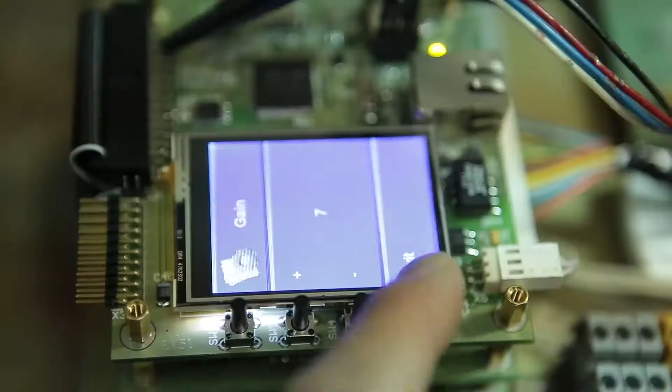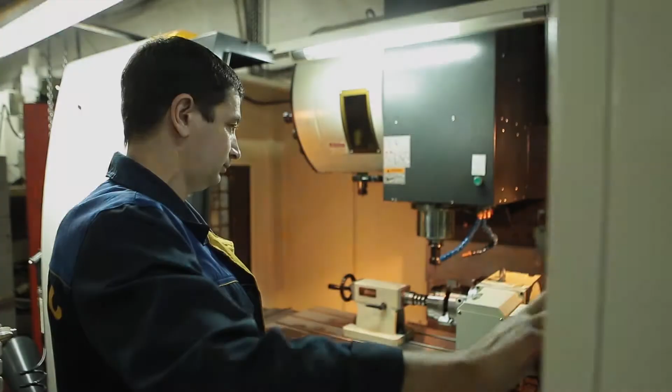Due to these circumstances, the company Technoros applies the latest results of science and technology in its development and releases products with world-class quality. Technoros is a diversified manufacturing enterprise with more than 20 years of history. We offer innovative technologies and equipment of our development. We have facilities with a full production cycle, from the design of a new equipment to its serial production.

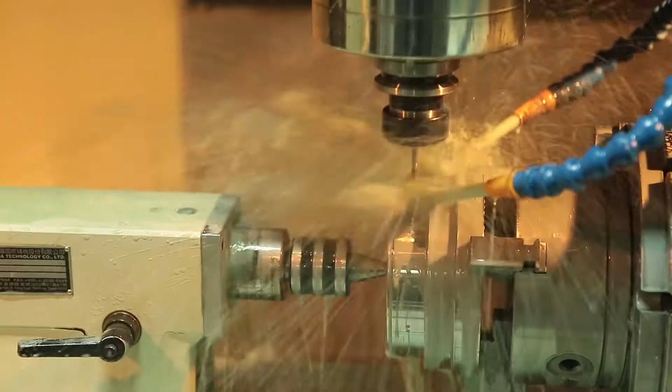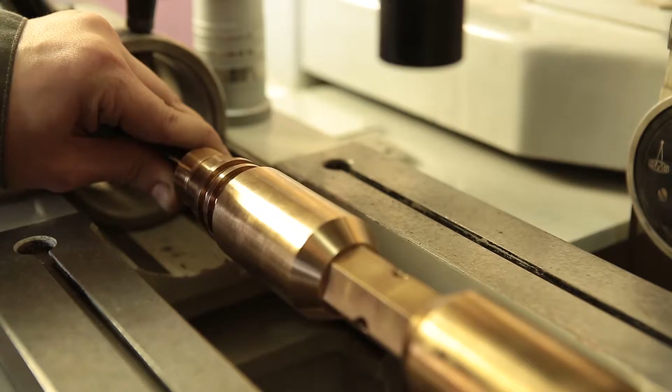High level of quality, technology and production culture of the enterprise is a priority task at all stages, from design to manufacturing of finished products. Our team of engineers is ready to solve complex production problems. Advanced technology and quality system implemented at our enterprise enable to develop and manufacture a wide range of automation facilities, non-standard equipment and precision machining details.

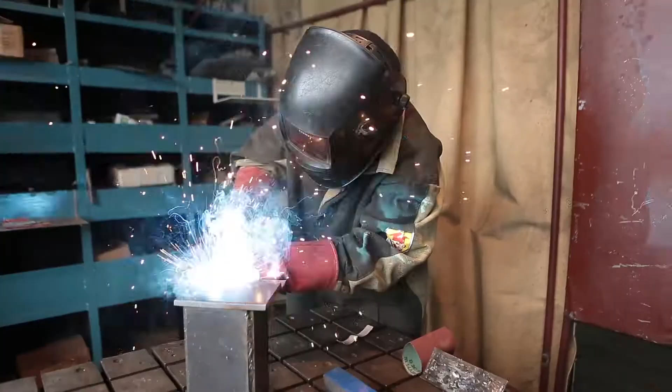To date, we have already implemented our products at various enterprises, from warm seas to far north, from the southern deserts to the Arctic shelf.

Ore sorter KSF for lump sorting of ore and technogenic materials. The fundamental in the materials industry is in the ore body head grade. At the present time, the global challenge of the mineral plants is falling ore grades. Metal production from such ore is expensive and low efficient. Considering the uneven distribution of valuable minerals in the run-of-mine ore, it must be sorted in order to get quality materials for mineral processing plants.

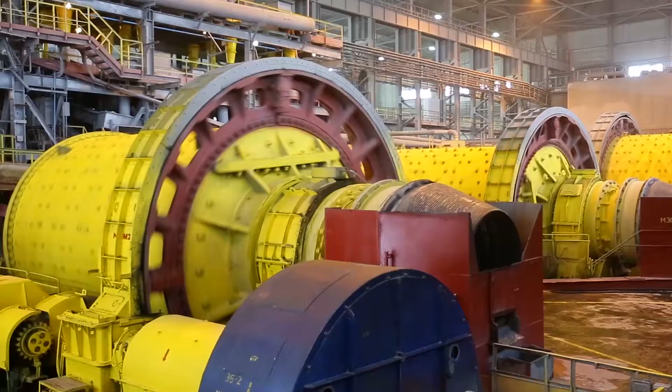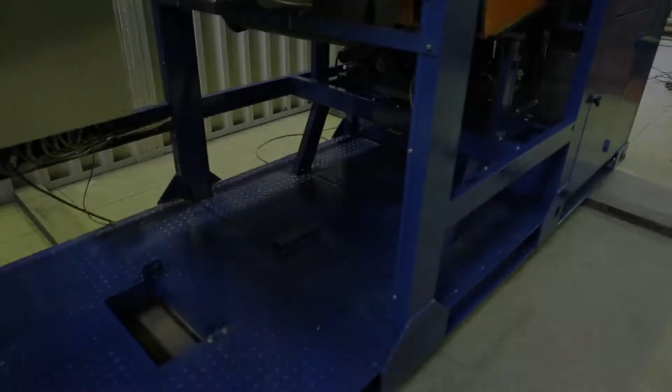The effect of sorting consists in the increasing of metal production while the amount of material fed to the milling circuit decreases. The economic impact is in reduction of the production costs. In ancient times, the ore was sorted manually by specially trained workers. Human labor has been replaced by machinery. Such equipment is designed and manufactured in our company. It enabled to separate the stones containing valuable mineralization from barren stones using X-ray fluorescent ore sorters. The product of ore sorting and pre-concentration is a high-grade ore.

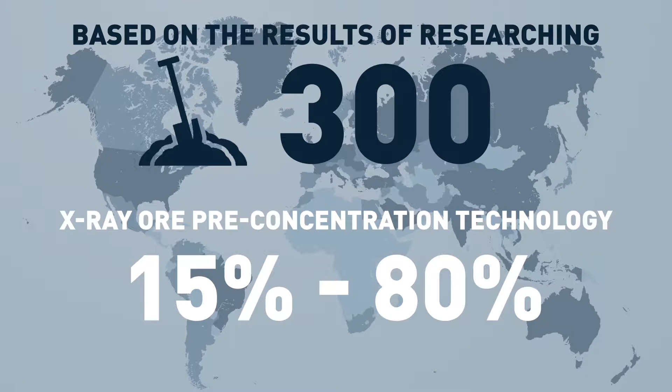Based on the results of researching on more than 300 deposits, we found that X-ray ore pre-concentration technology can reject from 15% to 80% of waste stones from the run-of-mine stream, which contains no economic metal values. Ore sorter KSF is designed for pre-concentration of low-grade ore, separation of ore into diverse types, followed by its separate treatment in the plant, production of sellable concentrate, sorting of slags and wastes of metallurgical industries.

Ore sorter can be applied in precious metal processing, gold, silver, platinum, polymetallic and monomineral ores, cobalt, copper, zinc, lead, tin, antimony, barium, etc. Ferrous ores, chromium, manganese, iron, rare metals, diamonds, fluorite, quartzite, sillimanite, magnesite, bauxite, coal, waste and slag of refining factories, aluminum, silicon, copper production, etc.

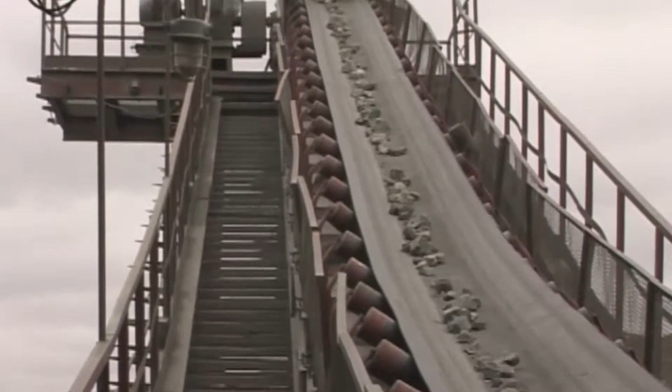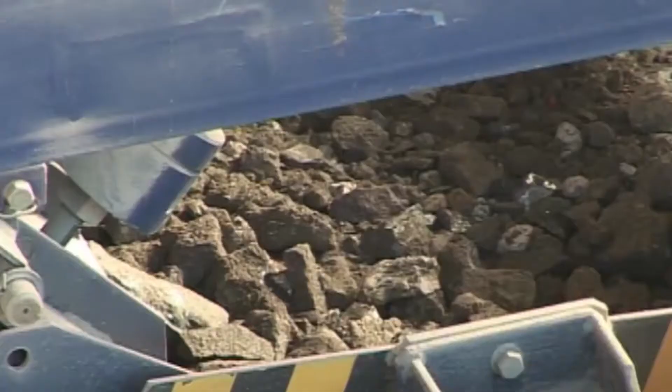It is based on processing of the secondary X-ray spectrum detected from the surface of individual stones and processed by the measuring and control system. Operation of KSF sorter consists in the controlled feeding of stones of certain size from the storage bin. Then the vibrating feeder drives ore to the vibration spreader. After that, the stones are distributed among sorting streams in the monolayer and are fed one by one to the analysis separation area.

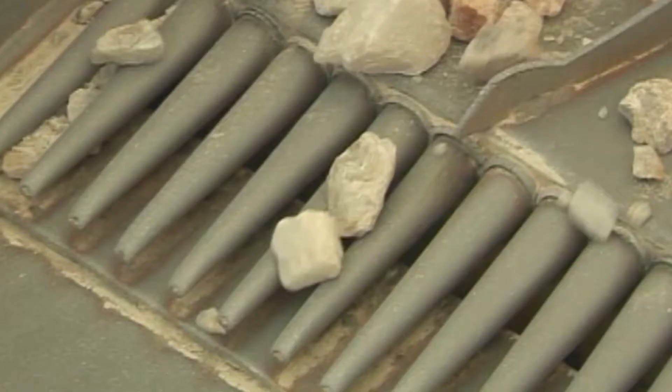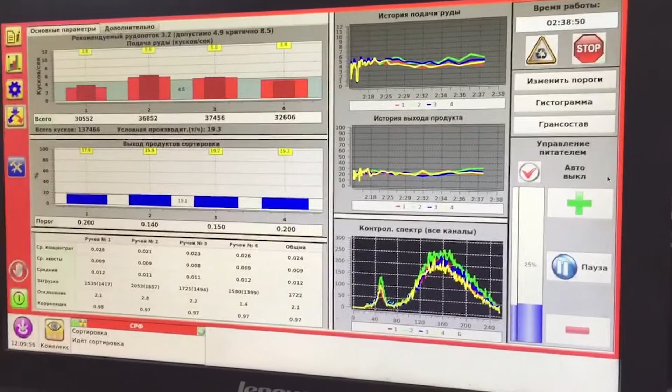In the analysis area, fluorescent analysis of material composition of individual stones is carried out. Then microprocessors of the measuring and control system compare the results with the predetermined threshold and decide whether the stone contains metal values in economically recoverable amounts. The physical separation of stones into two classes of stones, ones that contain metal values and ones that do not, is performed by actuator according to the signals of the measuring and control system.

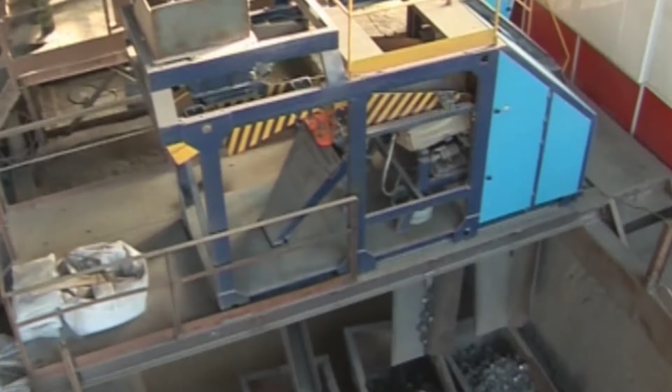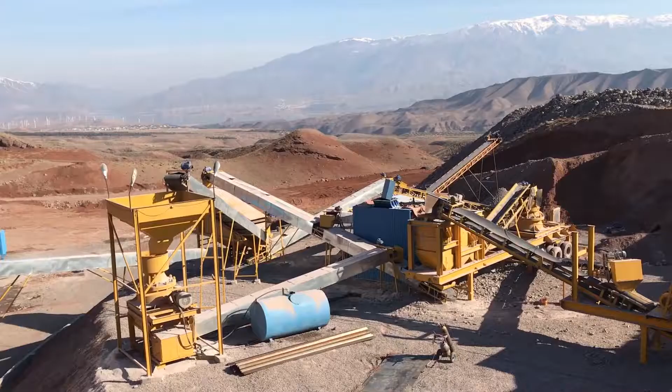The monitor of the operator's console displays all the service information about the operation of the hardware and mechanical part, the sorting parameters, and the results of ore grade before and after separation. The equipment for the ore sorting has been successfully implemented in more than 50 Russian and foreign mineral processing plants. The sorting process is dry, low-cost and environmentally harmless. Sorting equipment is mobile and does not require building any capital structures.

Ore Control Station RKSKM for real-time ore grade control. At present time, ore grade control is carried out by a special service in the plant using manual sampling and its subsequent assaying. Sampling is carried out irregularly. Moreover, assaying usually takes a long time, and the plant personnel receive the results with a long time delay. Therefore, it is difficult to accurately estimate the grade of current ore.

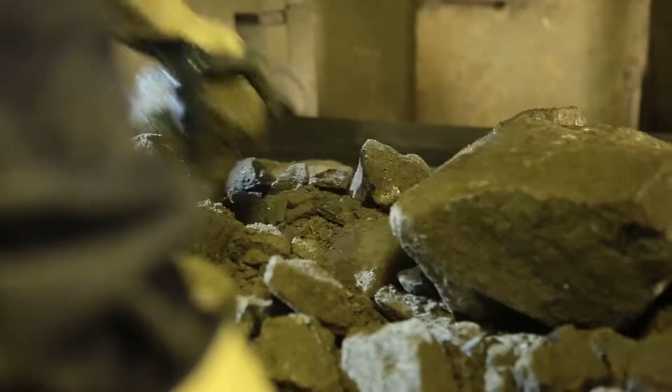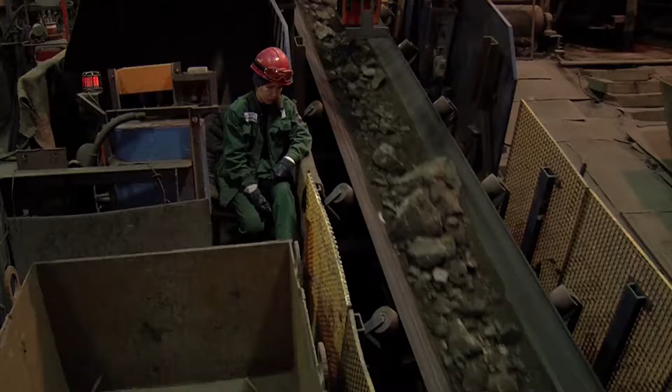As a result, if the stability of ore grade is impaired, plant personnel are unable to make the necessary adjustments, which will eventually lead to an increase in processing costs and a decrease in metal recovery. Our team of engineers developed the ore control system named RKSKM, which carries out a real-time continuous assaying of ore on the conveyor belt. The software of the station enables to build on the basis of RKSKM automated systems for ore grade control for any number of ore streams and various industrial types of ore.

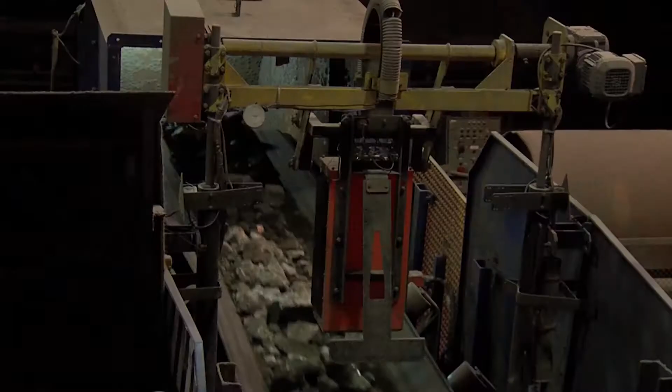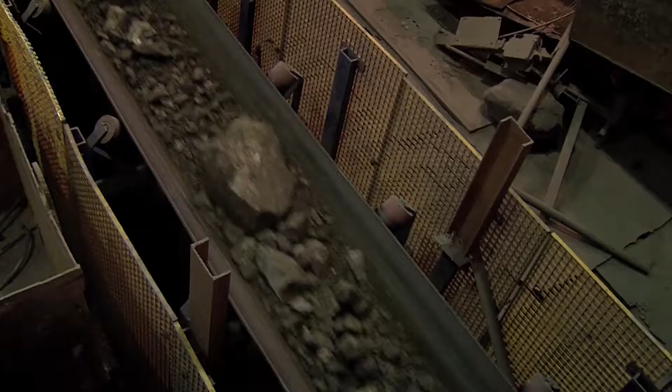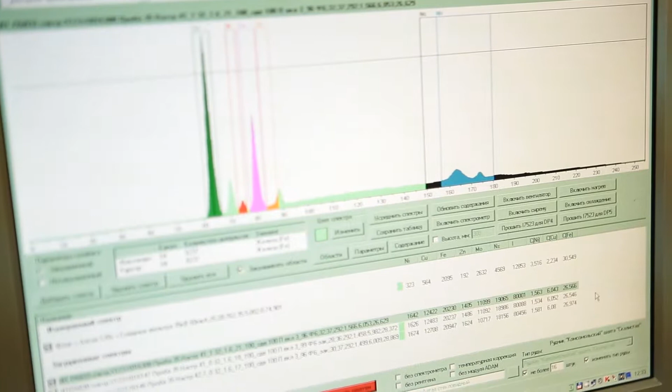The information of the ore grade is continuously monitored, preserved and used for the operational, organizational and technological measures to stabilize ore grade through directed blending, optimization of ore streams, as well as for analysis, accounting and control of ore mining and transportation. The information is displayed on the monitor in the form of specialized interface for managers, geologists, technologists with the ability to form management decisions and reporting documents for any period of time.

The station is equipped with an ultrasonic sensor for measuring the volume of ore passed through the conveyor, which enables to calculate ore grades with a high accuracy for any period of time, from 30 seconds to several months. Each type of ore requires a specific equation for calculating the element's grade. Therefore, the algorithm for automatic determination of the ore type is incorporated in the software of the RKSKM station. If there are several types of ore on the conveyor belt, the RKSKM station will automatically determine every ore type and calculate the element's grade according to the proper equation.

The station has a convenient interface that enables to monitor operating parameters such as conveyor loading level, current ore grade, station condition, belt running or stopping in a dynamic mode. All the parameters are stored on the hard drive and can be claimed for any period of time if needed.

RKSKM control station applies X-ray fluorescence to identify material composition. As a source of primary X-ray irradiation, X-ray tubes are used, which is not harmful for personnel. Registration of fluorescent radiation from chemical elements is carried out by a semiconductor detector. According to the spectral peaks, elemental composition in the controlled ore is calculated.

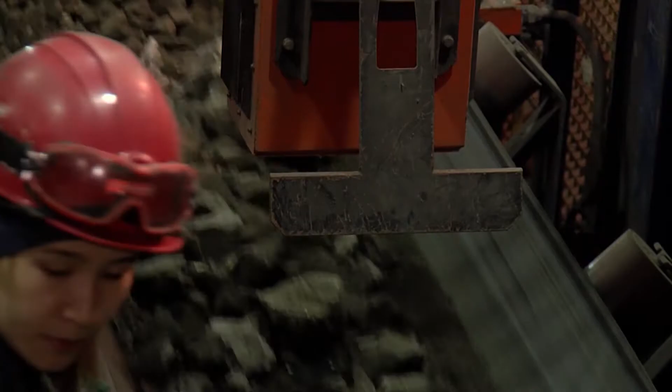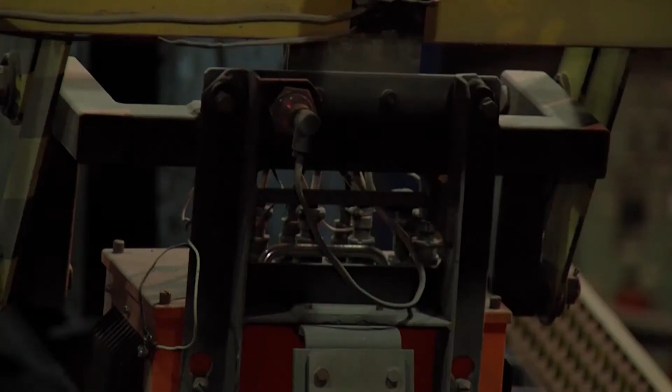The station is a fully automated measuring and analyzing device operating in the continuous mode in the mineral processing plant. It can work autonomously or be connected to the local computer network under SCADA control. We supply our station with all necessary hardware and software for networking. Integration of several stations into the network enables to control all transport system of the plant, optimize ore stockpiles, stabilize the grade of ore fed to the milling circuits, and provide metal balance control.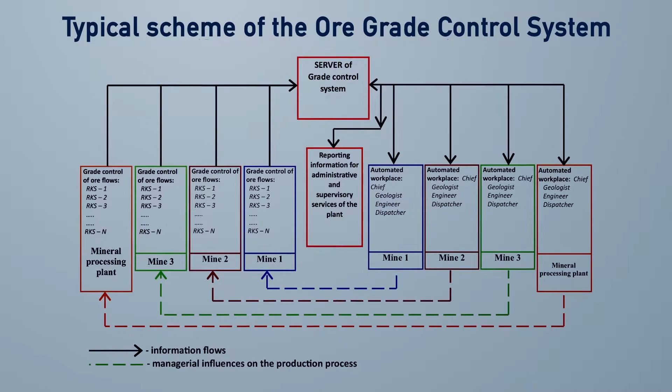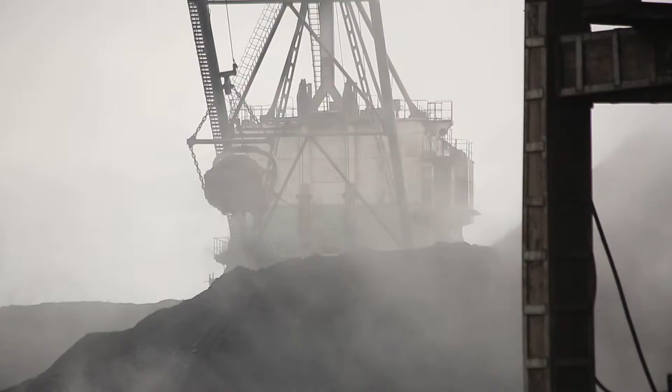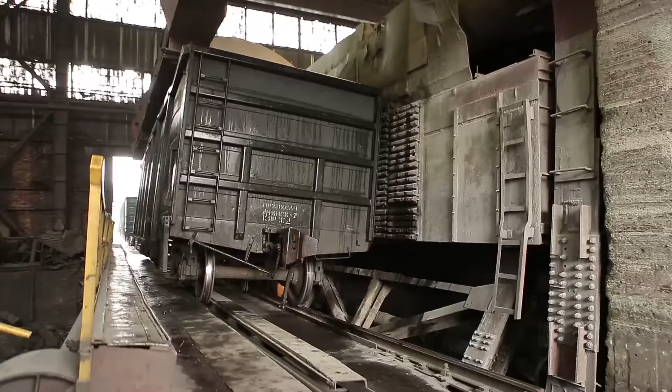System of Conveyor Protection KKZ-1M for the detection of harmful non-crushing metal fragments. Another problem related to the ore control on conveyor belts is the detection and removing of harmful non-crushing metal fragments from ore. Such metal fragments can get into the ore during mining and transportation, which can lead to damage to crushing and other processing equipment or cuts of conveyor belts.

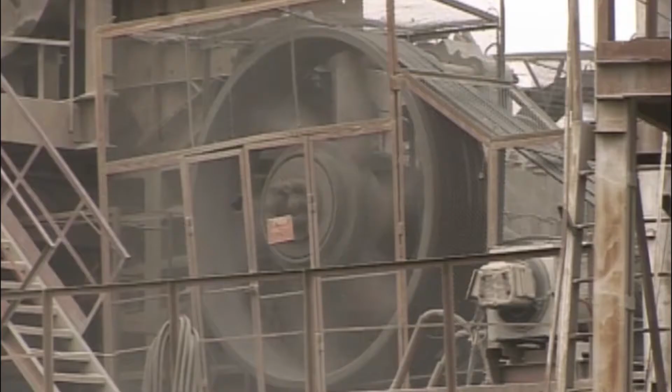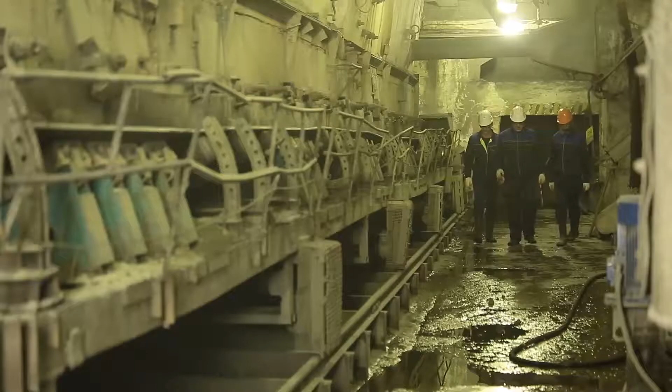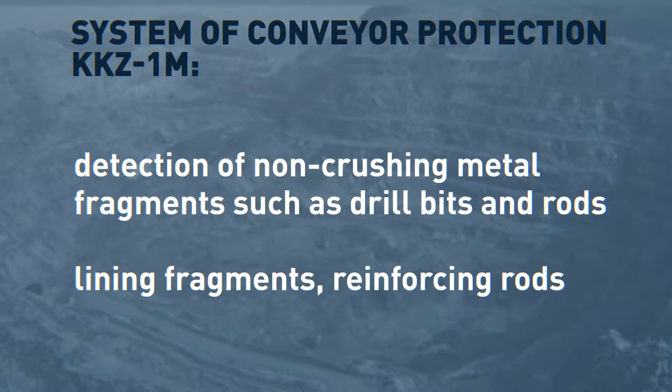We have developed a system of conveyor protection named KKZ1M, whose purpose is detection of non-crushing fragments such as drill bits and rods, lining fragments, reinforcing rods, etc. We guarantee the detection of metal fragments in a wide range of sizes, different form factors, from magnetic and non-magnetic alloys, including armor steels and non-ferrous alloys.

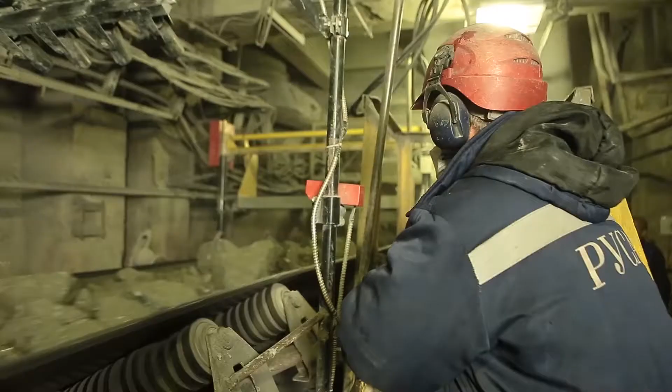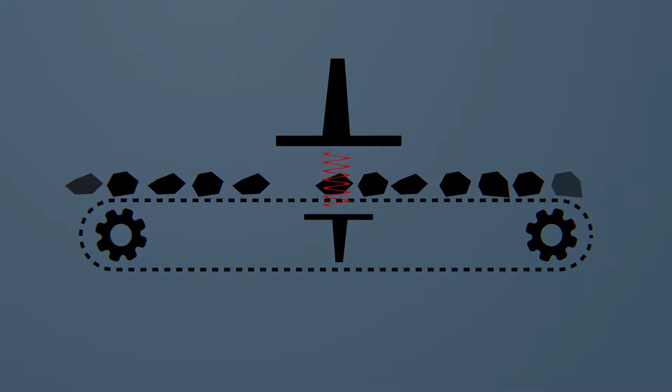Detection is based on the principle of electromagnetic pulse sensing. The conveyor pile is analyzed by electromagnetic waves, penetrating the material surface, which ensures reliable determination of the metal fragment, regardless of its position on the belt. The system is completely digital, thus ensuring the stability of indication.

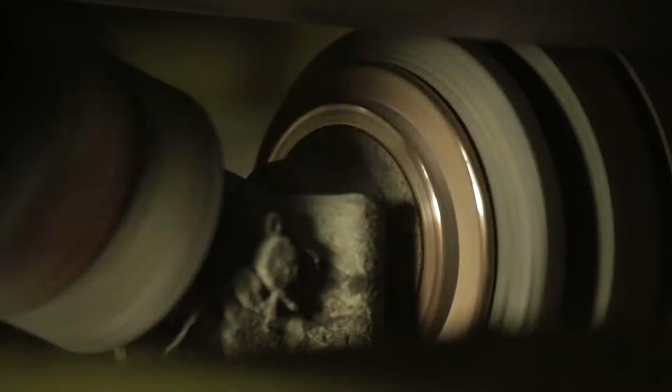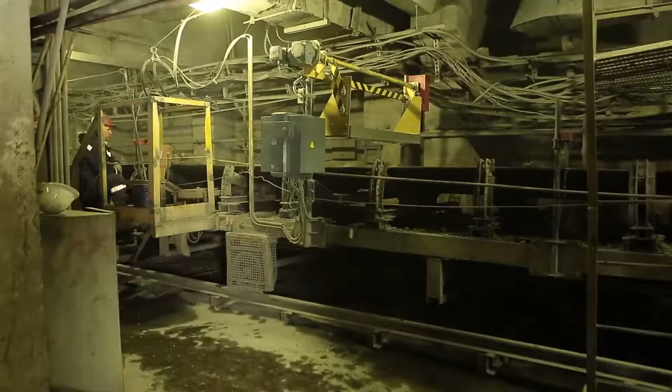KKZ1M is a device with a high degree of automation. The required operating settings are set during tuning and stored in the device memory. All parameters and operating results are accessible to the operator through the local computer network of the plant. Also, it is enabled for offline operation without connection to the plant network.

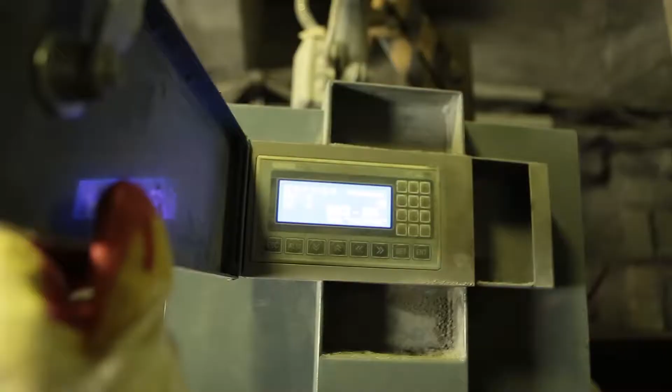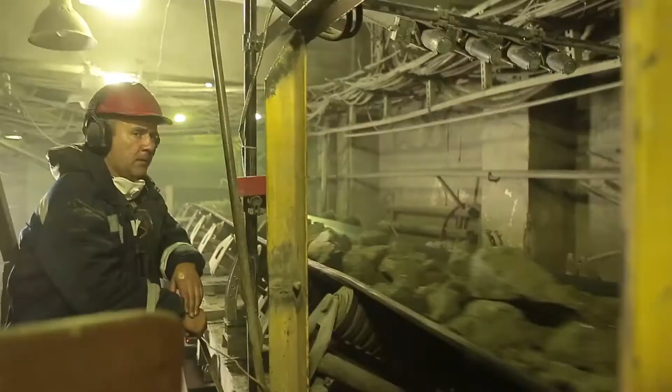KKZ1M enables to make program changes to the tuning mode in order to search for the smallest metal fragments, to exclude responses for small fragments that are not harmful to the plant equipment. If the metal fragment is detected, the system activates a light signal indicating location of the fragment. Then the belt conveyor is stopped for the manual removal, or a guard magnet is activated for automatic removal.

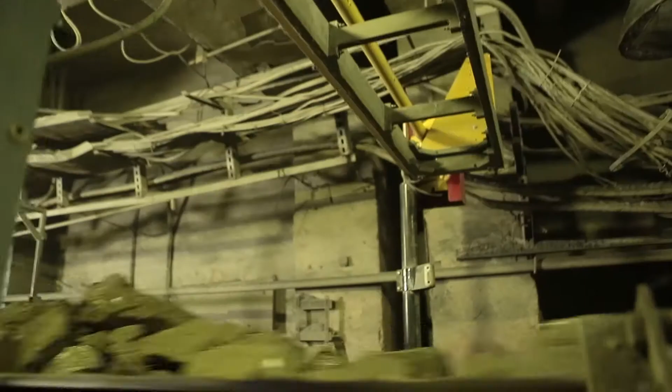KKZ1M reduces the downtime of the conveyor and the labor consumption of removing the detected metal fragment by accurate indication in the conveyor embankment with a special light indicator. To protect our station from oversized lumps of ore, we also offer a protective device against oversized materials, named Zone 1, which enables to avoid emergencies.

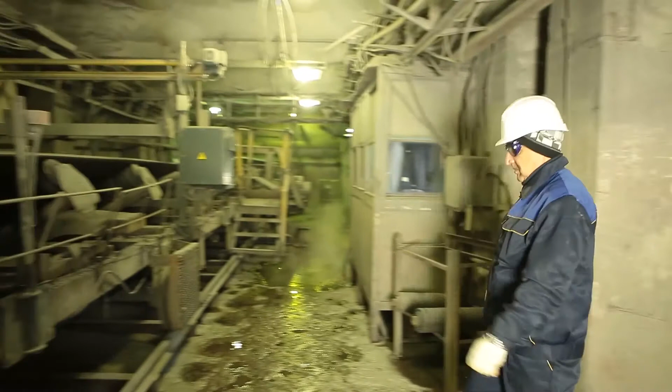Installation of KKZ1M does not involve construction and installation works, modification of conveyor structures, or other additional measures. The device is installed on a standard conveyor belt with a supplied kit.

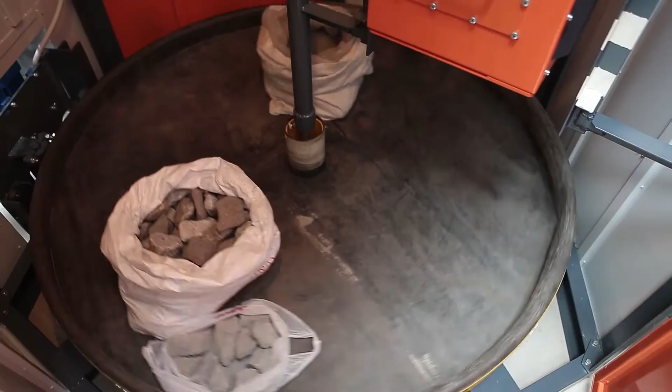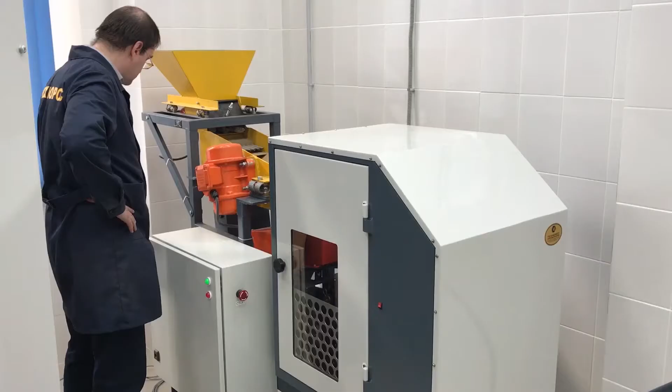Research Center for Technological Testing of Ores. Each deposit is unique in its geological and mineralogical characteristics. X-ray sorting technology enables to increase the efficiency of ore processing plants of almost any deposits, but for each of them, research and technological testing is strongly recommended. Besides that, research works should be done on the representative technological samples in modern research centers with the latest equipment.

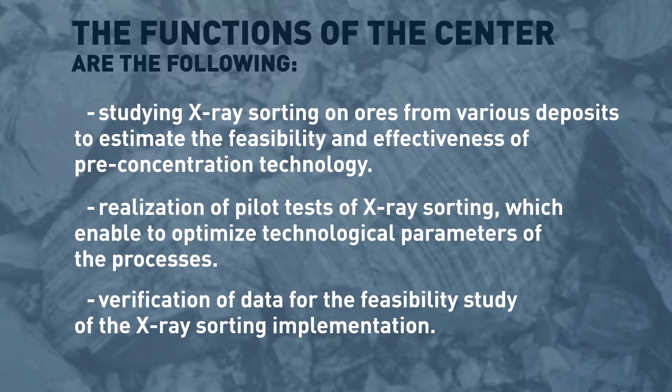The functions of the center are the following: studying X-ray sorting on ores from various deposits to estimate the feasibility and effectiveness of pre-concentration technology. Realization of pilot tests of X-ray sorting, which enable to optimize technological parameters of the processes. Verification of data for the feasibility study of the X-ray sorting implementation.

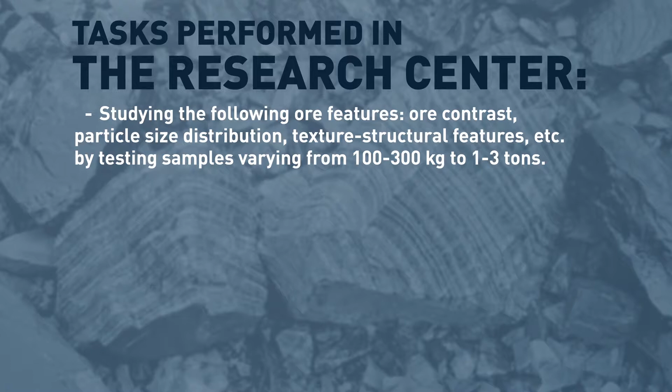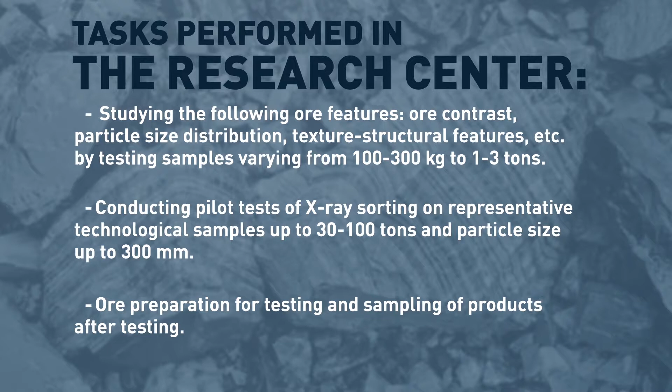Tasks performed in the research center: studying the following ore features: ore contrast, particle size distribution, texture structure features, etc., by testing samples varying from 100-300 kilograms to 1-3 tons. Conducting pilot tests of X-ray sorting on representative technological samples up to 30-100 tons and particle size up to 300 millimeters. Ore preparation for testing and sampling of products after testing.

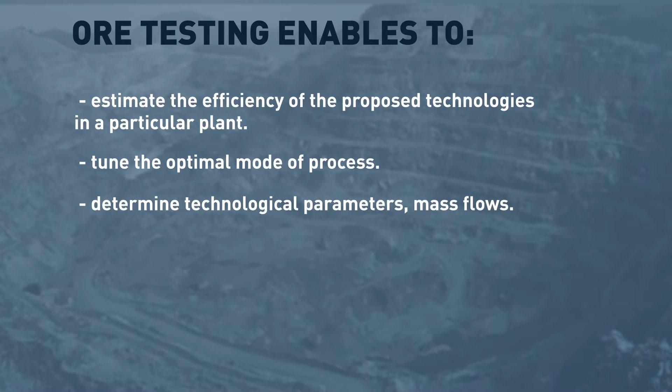Ore testing enables to estimate the efficiency of the proposed technologies in the particular plant. Tune the optimal mode of process. Determine technological parameters, mass flows. Obtain initial data for technological regulations. Calculate plant economical efficiency.

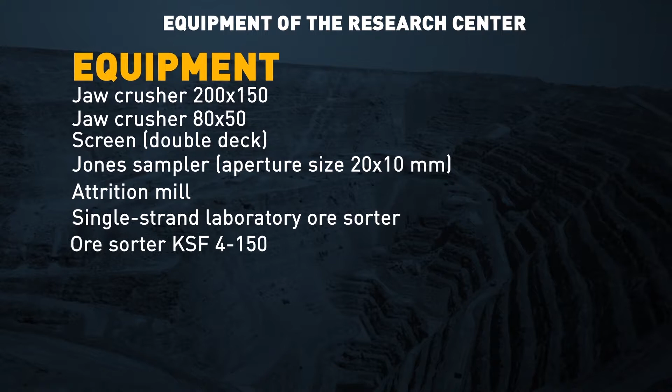Equipment for the research center: jaw crusher 200 on 150, jaw crusher 80 on 50, screen double deck, Jones sampler, aperture size 20 on 10 mm, attrition mill, single-strand laboratory ore sorter, ore sorter KSF 4-150, receiving hopper, volume from 3 to 5 cubic meters.